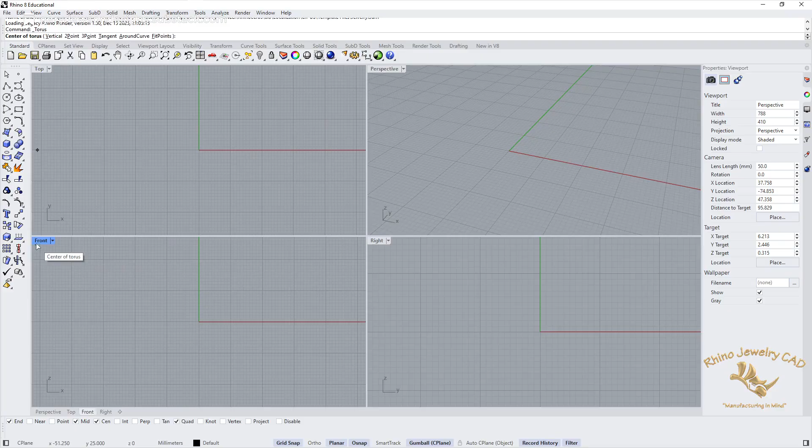So what we're going to do today is make a sort of signet-style ring out of a torus, one of Rhino's solid objects. In the front viewport, we'll start at the zero, the origin, we call it in Rhino.

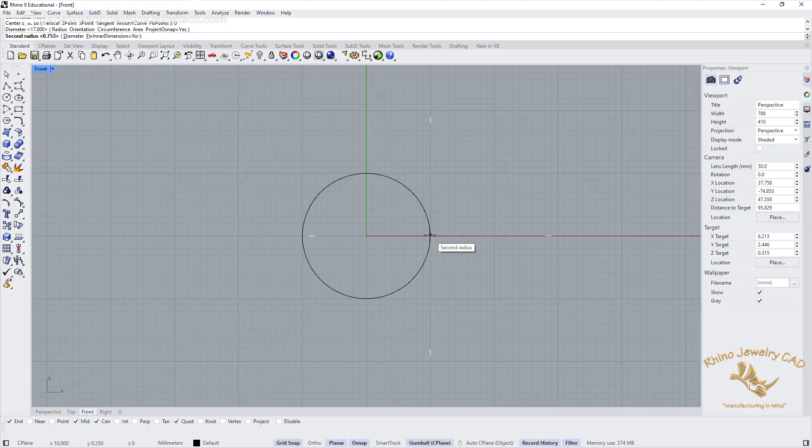We know a size 10 ring is about 20 millimeters in diameter, roughly. So this isn't going to end up a size 10, but we're going to make our first click out here at 20 millimeters. And then we're going to bring this in—let's zoom in here.

We want this to end up being a shank of about 1.5 millimeters. 2 millimeters wouldn't be bad—let's go a full 2 millimeters. And so now we have our torus. Let's see what this looks like in perspective view.

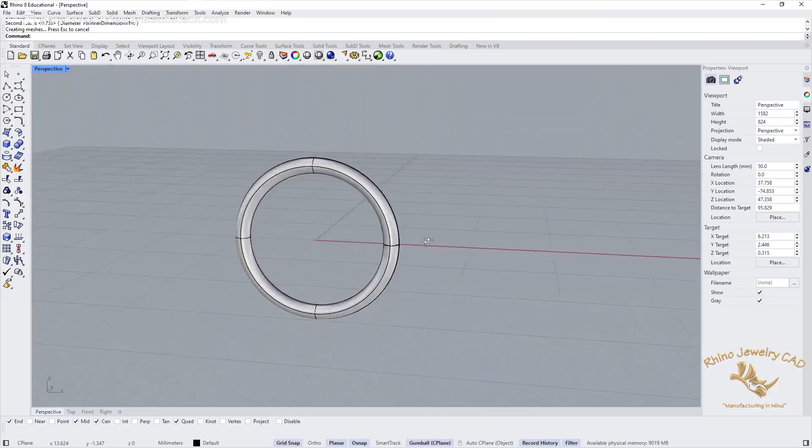Before we continue, we're going to do one thing here. We're going to select this object, go to surface edit tools, and adjust the closed surface seam. Right now it's at top dead center of the outside of this torus.

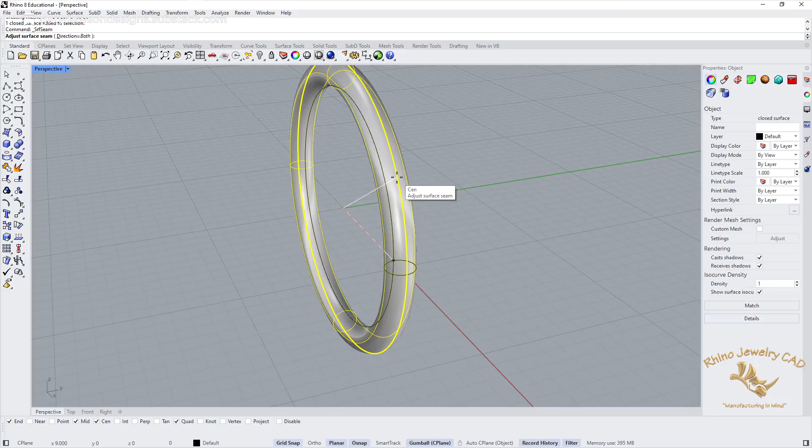We want to move it to the inside, just like that. Simple enough. And now, it didn't look like the seam actually moved. Let's try this again.

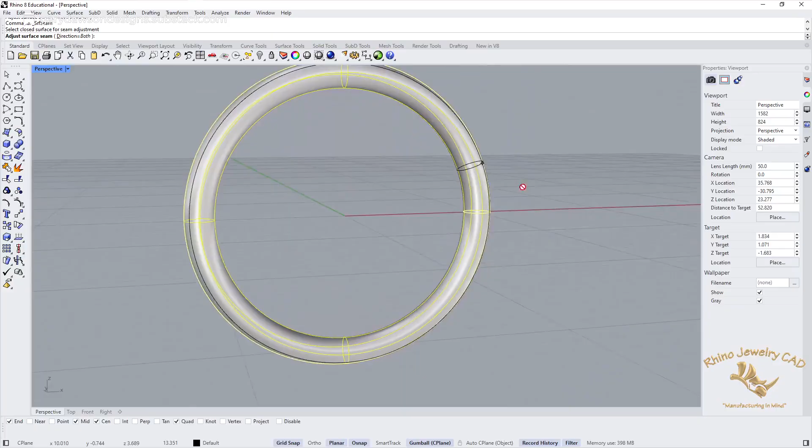Surface edit tools, adjust closed surface seam on here. Yeah, for some reason we didn't get it. Here we go, let's see. Yeah, there we go. And that should have done it, but it didn't. Here's the problem—it worked fine when I was practicing.

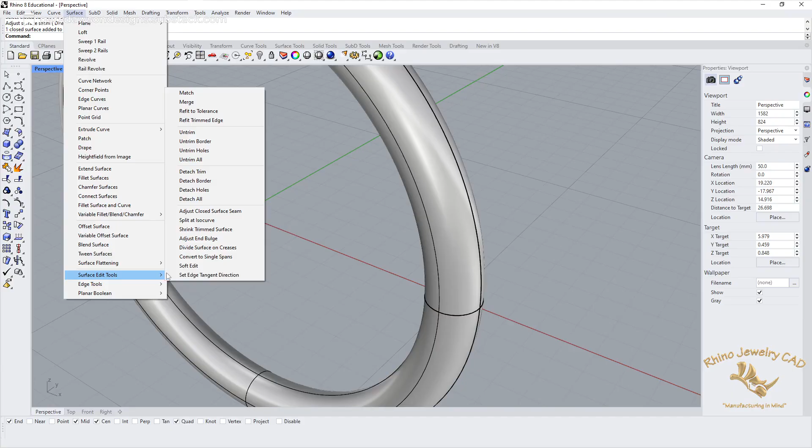Oh my gosh, we're going to do this one more time. Surface edit tools, I promise this works. Adjust closed surface seam on this surface, and we're going to take it from here to this midpoint. And I'm still not sure we accomplished our goal.

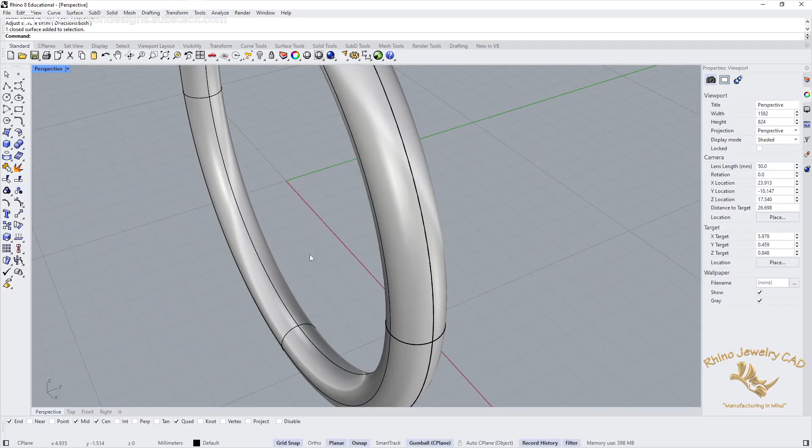So now, if you could see my face, you could see it's really red. I'm going to keep plowing at this until I can get it to work. Let's take off center, mid, quad, and end. Let's unclick end and try this one more time.

It's funny, when I was practicing yesterday afternoon, it worked just fine. Surface edit tools, adjust closed surface seam on this surface, and we want it to be right there.

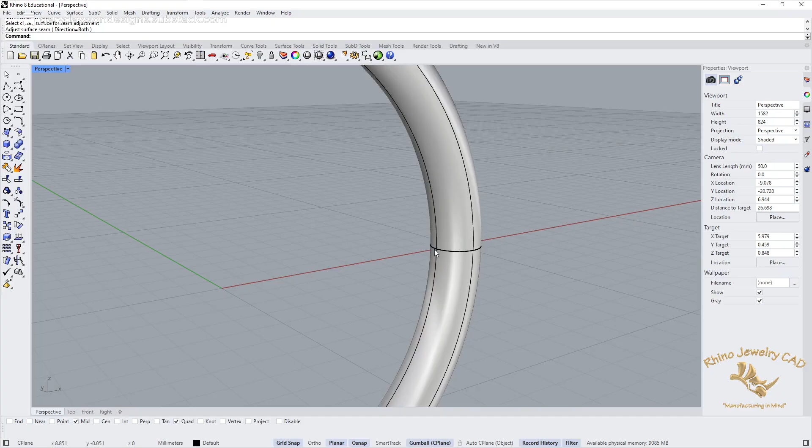And it still didn't work. Well, it's not imperative—it would have made this go a little more smoothly, and I'll have to come back and do a short video on why this didn't work for you. But let's proceed; I'll show where it would have made a difference as we get further into this. I apologize for that glitch, but that's the fun thing about doing a live demo—you see what happens when you're using Rhino, you run into these little things as they happen.

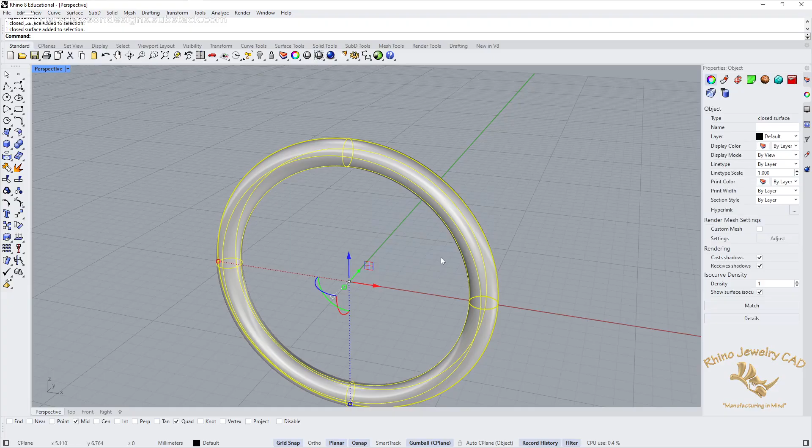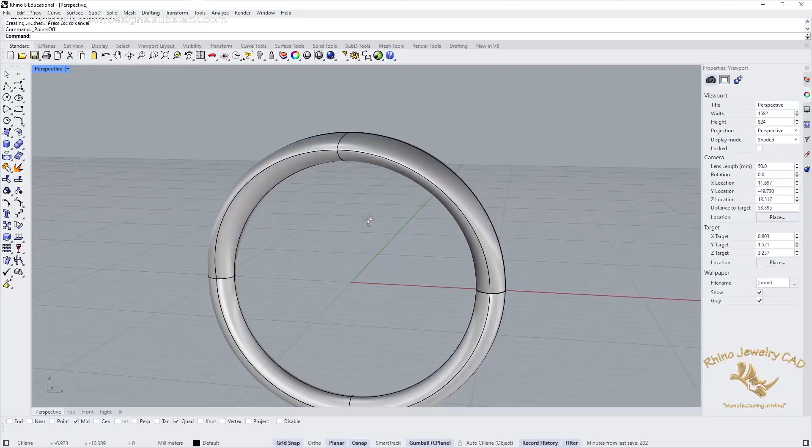Let's highlight this and turn on control points, F10. One of the things we want to do here is just make the top wider. Now, here's the deal—I'm going to turn control points back off, F11, really quickly. That's okay, that accomplished what I wanted, more or less.

But I don't like this transition. I'd like for that to be a much smoother transition, so I'm going to Control Z out of what I just did. I'm going to select this and rebuild, and when this pops up, you'll see I don't necessarily want more point count in either U or V, but I definitely want to change it from degree 2 to 3, and you'll see what difference that makes.

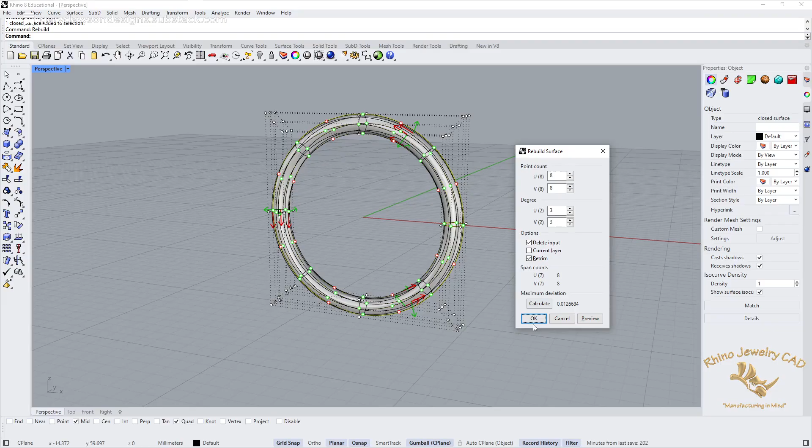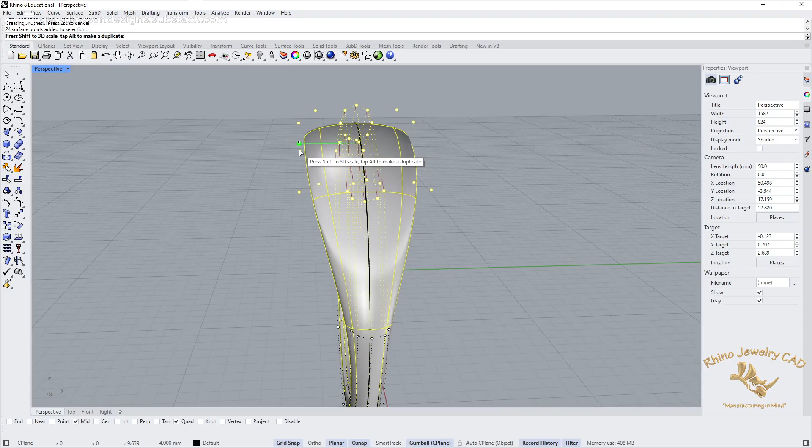Let's click OK here, and you can see our control points have changed a little in character in terms of how they follow the torus all the way around. Let's select that same group and do the same kind of scale we did before, and watch this transition point here. See how this is a much smoother transition into the top of the ring? I like that a lot better.

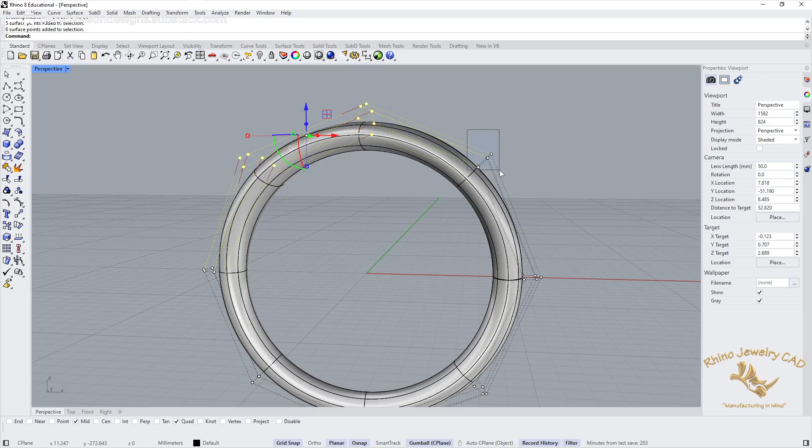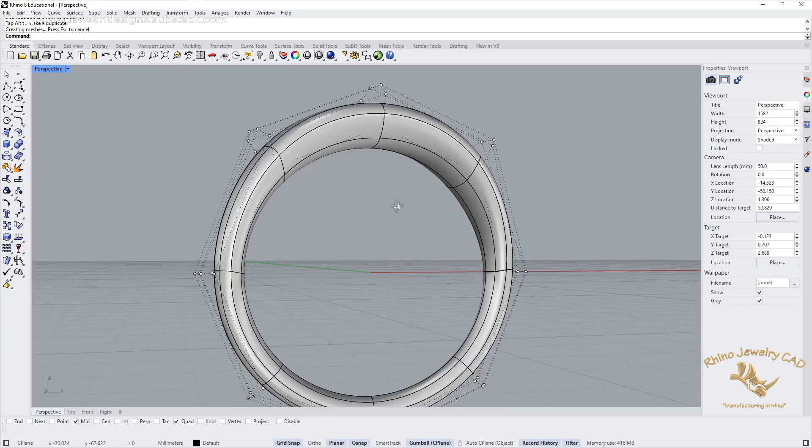Let's leave these control points on for now, and let's select this group of control points. Holding down Shift, we'll select that group of control points, and shift-select that group also. Now we're going to make the top of the ring a little thicker by simply moving those up. Again, since it's degree 3, we have a nice smooth transition all the way around. It didn't affect this transition much, but it gave us a thicker area to work with on top.

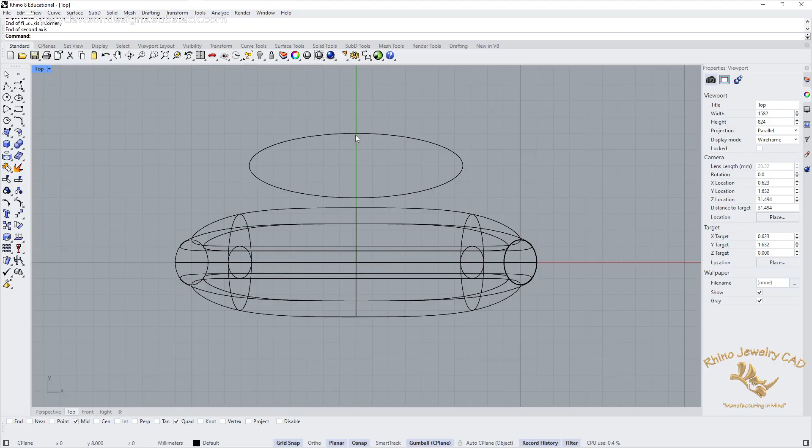It's getting fun now. Okay, let's turn off control points—that's F11. Pop into the top viewport, and let's make an ellipse. Have grid snap on, so this will make it easy. We're going to just eyeball this ellipse. I'm going to shift-constrain it out to the right about as far as I think will be appropriate for what I want to accomplish, which you'll see in just a minute. And then make it about that wide.

Then I can move this down so it's basically centered on the origin as well as the ring. Let's look at what we have here—okay, that's in perspective view. We're going to select, use the directional arrow just to move this up. And again, from the top viewport, we're going to type in the command project.

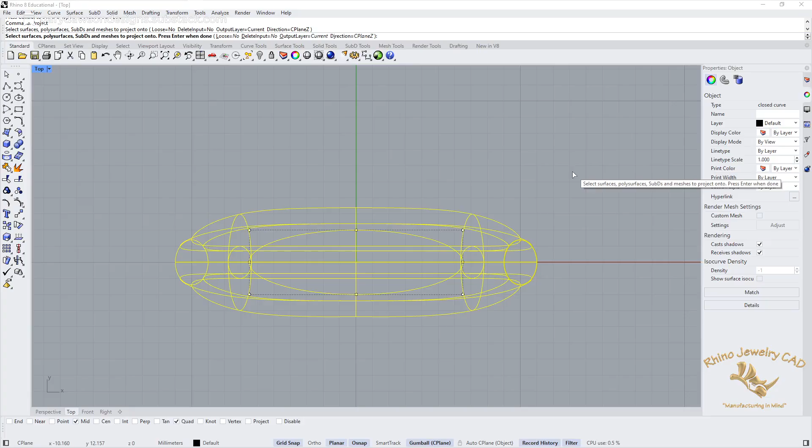Select surfaces—see, this is still just a single surface, so there's no way to isolate this projection onto the top of the ring, which is the only place we really need it. But that's okay. Press enter. Now if we look at this again, you can see the one at the top is really the only one we needed. Let's deselect that one and then delete the other highlighted ones. If we were doing good layer management, I'd put this on a layer so I could come back to it, but in this case, for the demonstration, I'm just going to delete it.

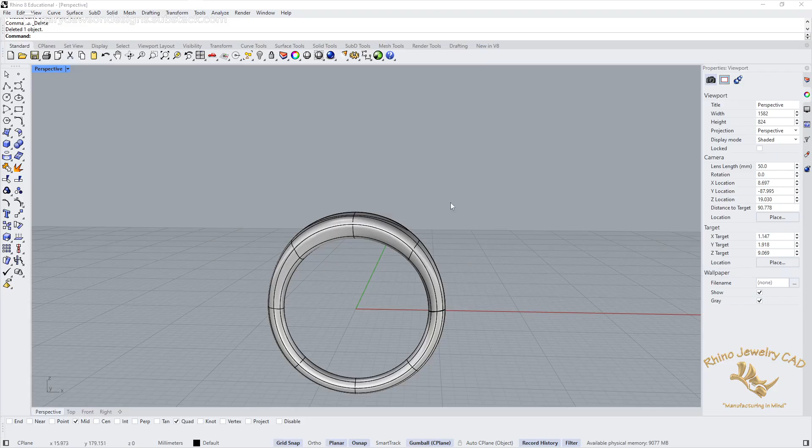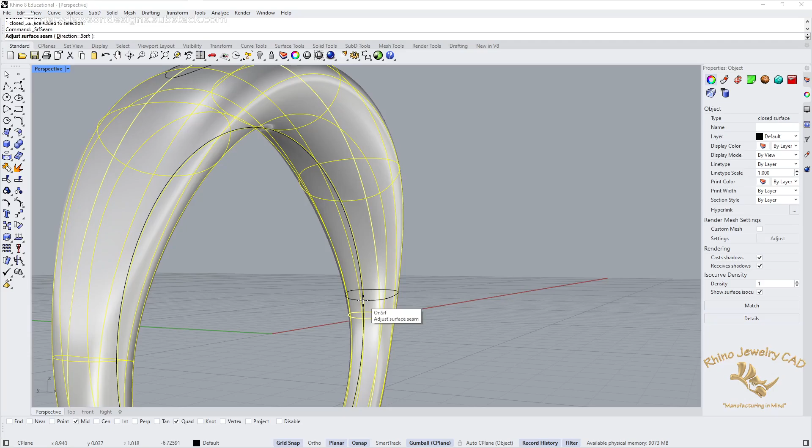All right, I'm going to try this just one more time here. Let's select the surface while we still have it. Surface, surface edit tools, adjust closed surface seam. Now I just don't understand why that's not working, but let's see if it worked that time. Oh, bingo, okay, we got it. It's not perfectly centered, but in this case it really won't matter. I'll show in the next step why this will make my life a little easier as we progress through modeling this ring.

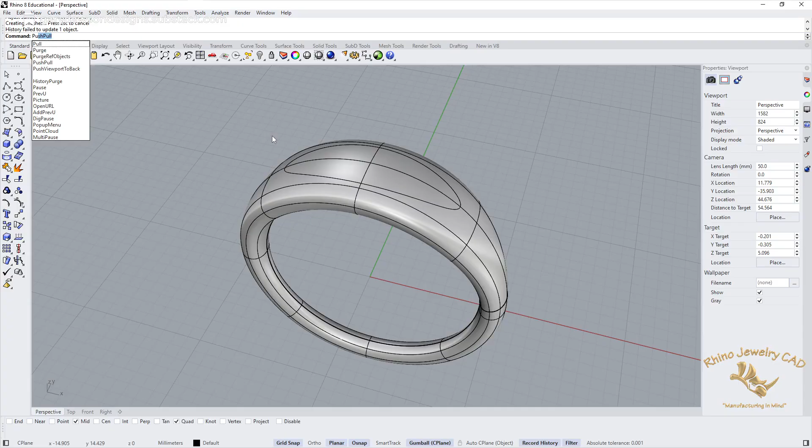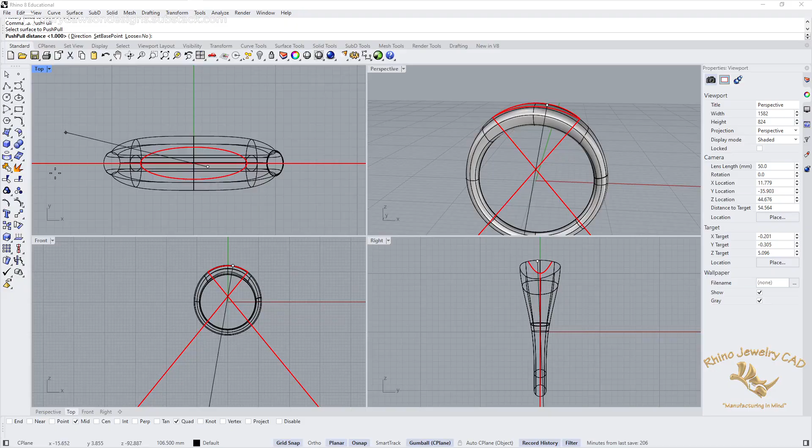Okay, now we're going to use a command that's new in Rhino 8 called push pull. We'll just type it in, push pull—Rhino autofill fills it out in the command line. We push enter, select the surface that is isolated by the curve on the surface we created with our projection, and notice how we can pull that out if we want to. In this case, I'm going to switch to the front view, and we're going to pull that surface in just a little bit. There are several ways to do this, of course, but this is a way that's relatively new in Rhino 8 using push-pull.

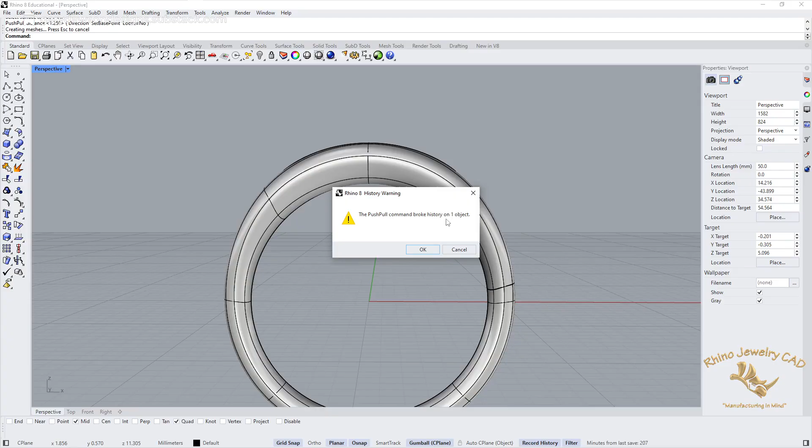Here's a very simple way to create an inlay channel or something similar. I'm going to Control Z out of that since I don't want it quite that deep. Let's re-invoke the command, do it here, and make it about that deep. Okay, that looks a little bit better. Even in a weird demonstration, I like to make things at least somewhat aesthetic.

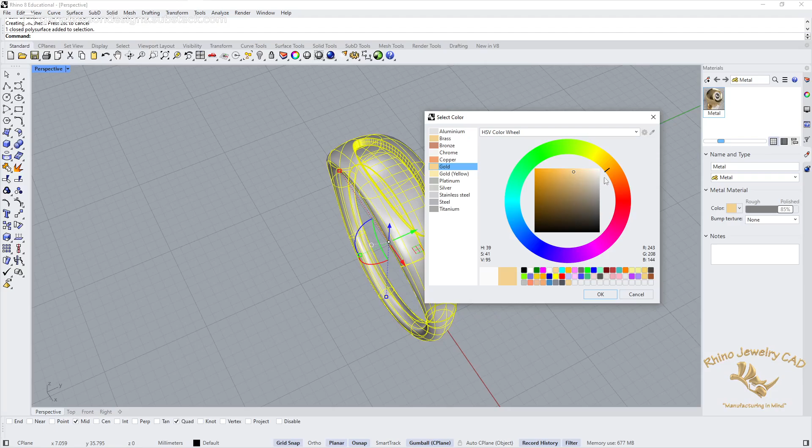Now the final thing we're going to do is talk about managing textures. You know that if we go into materials, we can assign a material to this. Let's make it a metal, and let's make that a rich yellow gold, which Rhino already has available. Then we right click on this to assign it to that object, so the whole thing is in fact that material. If we render it now, we can see it should render as a pretty nice gold.

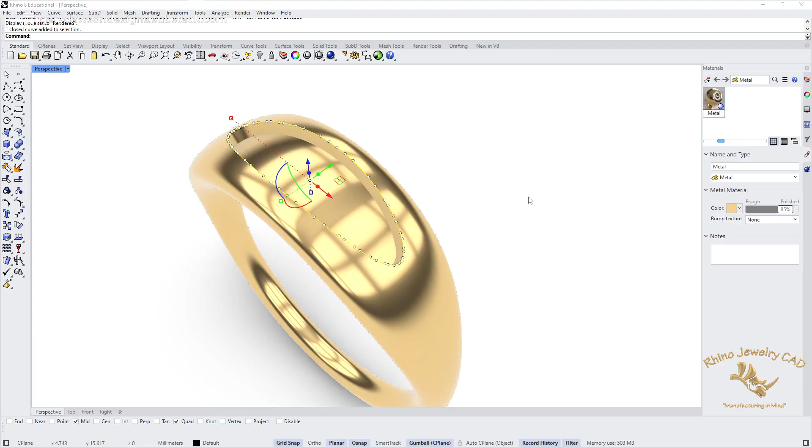Oh, we don't really need this curve anymore. Good layer management would have me put that on a layer somewhere, but in this case we don't necessarily need it again since this is going to be a short demonstration. So we'll do that, and we have this material applied.

We can, in shaded view, create another material for this. It will also be a metal, also a rich gold color, but let's make it a little less polished this time.

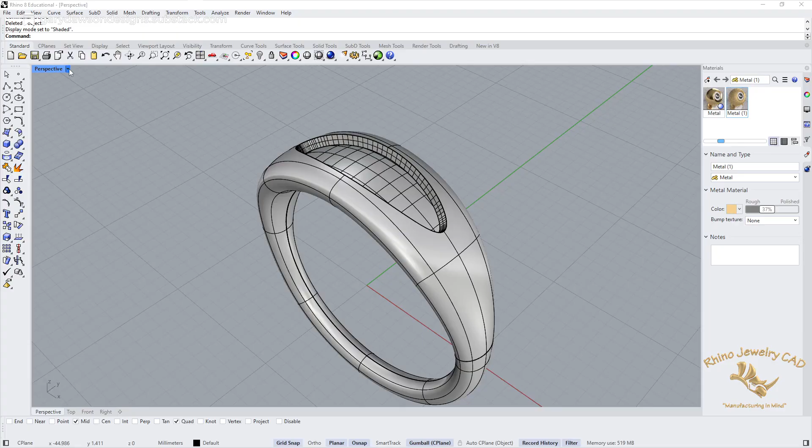Let's just look at what that looks like here real quick, rendered. We're going to Control Shift select just that lower surface and apply it to that surface, so we can get some differential there.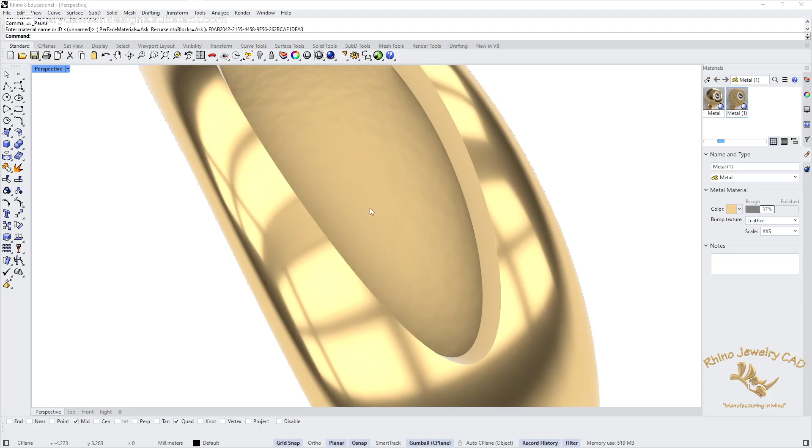We can also apply to this material - let's use leather here, a bump texture. And let's make this extra, extra small, which is kind of how it usually resolves best on jewelry sized items.

So you can see that we have a differential texture here, but now here's the thing: these bump textures you get in the materials application are only for rendering purposes. We go back to shaded view and it's not there - it does not exist.

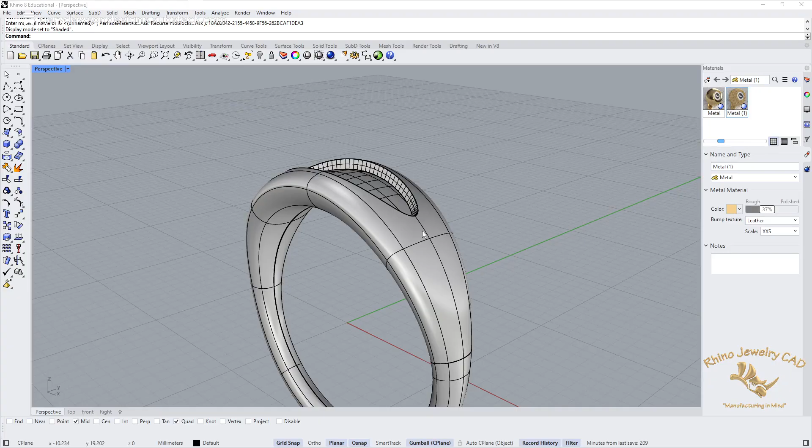So if you export this as an STL, even if it's in rendered mode, that surface texture is not going to go along with the STL file. So that's not exactly how we want to do this - we'd like to be able to print that textured surface right on there. So how do we do it?

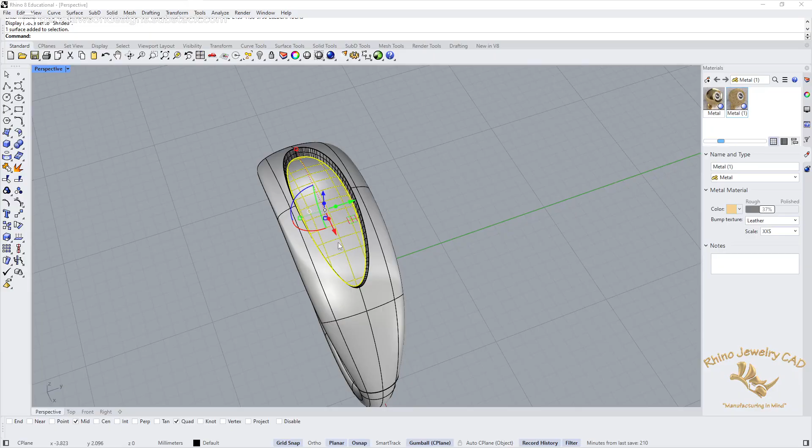Let's Control Shift select that surface. Oh yeah, and the reason for moving the seam, by the way, was that if the seam were still on the top of the ring, this would have ended up being two separate surfaces. Now that wouldn't have completely messed up our operation here, but having it be a single surface by moving that seam just makes it a little simpler for us to think about and work with.

Okay, while we have this object selected, let's go to Object Properties and Height Field - I'm orbiting over here in the upper right-hand part of my screen. We're going to go to displacement, that little globe with bumps on it called displacement. Okay, let's assign a texture here.

We don't have any to assign yet necessarily, so let's make a texture. I think there's a leather texture here somewhere - maybe not. Okay, let's just do a granite texture, all right.

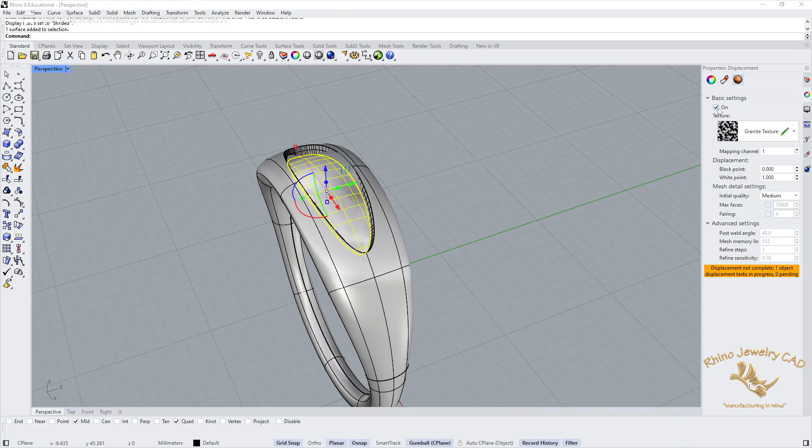And we will turn it on. And we don't see much here. Let's change the displacement values for black point and white point - let's change black point to negative 0.1, white point to 0.1, right?

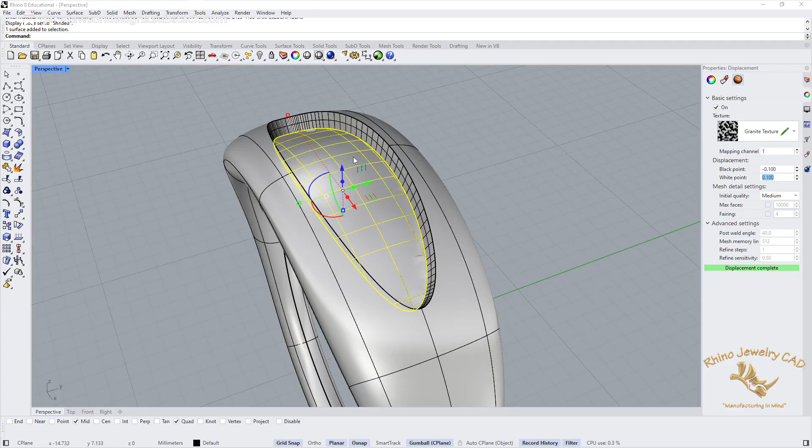But see, we're not - you can just see the beginnings of this texture sort of here and some tessellation that's going on. But we could actually, if we were able to change it from medium to high or very high, which comes up in the pull down here, then we could actually begin to see - this would be sort of on a jewelry scale - so we could actually see what this texture looks like and get it to print.

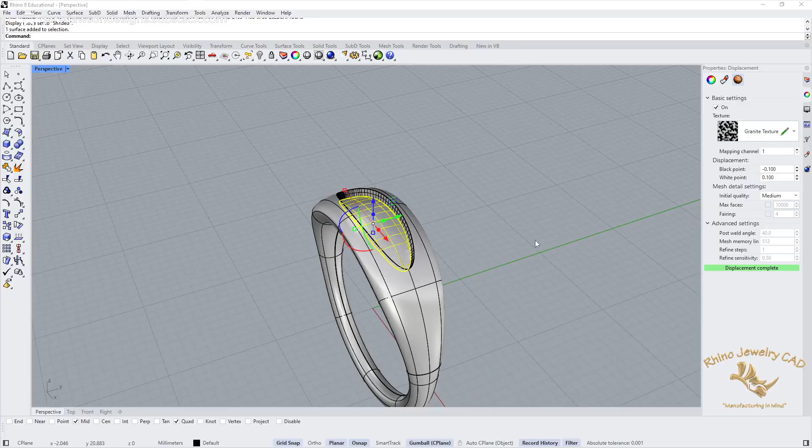Now, I wouldn't call this a glitch in Rhino, but in order to make this work there's something else you have to do. You have to select the whole object, and it works best if you create a different texture.

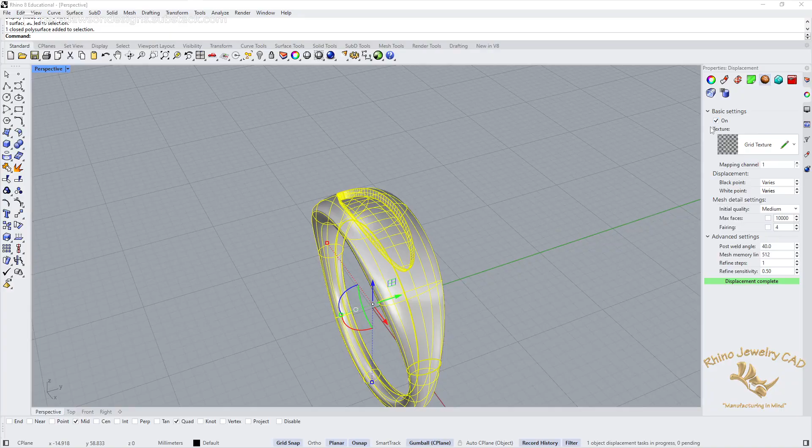Let's use this one, a grid texture, all right. And we will turn it off. But here, while we're here, let's actually turn it on, and you can see what happens here, just so you can see how this works. This is medium quality, and you can see that's not a very attractive piece of jewelry so far.

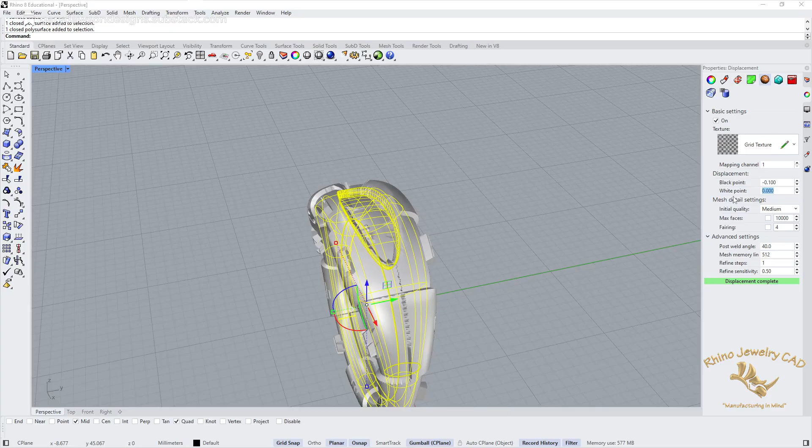But we click on this, we do our black point, negative 0.1, and our white point, 0.1 - that's going to help things out a little bit. But now watch what happens when we go to, say, a very high displacement. And see, that's still not exactly what we want with this.

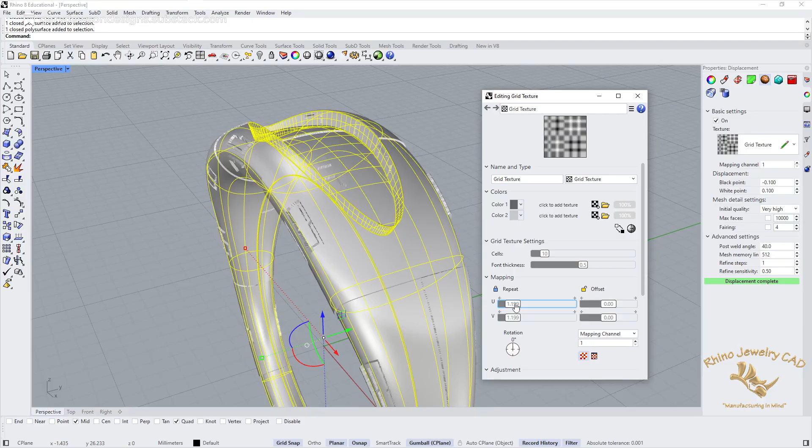So we're going to change a couple more things here. Let's click on the little pencil, and we will repeat this a bunch more times to get the displacement - see, the displacement's got to keep up with it. Here we go.

And the offset we can play with. Down here, there's a gain, gamma, and multiplier. We can make this be more of them on the surface or less of them on the surface. See how you can make these changes, multiplier, color adjustment.

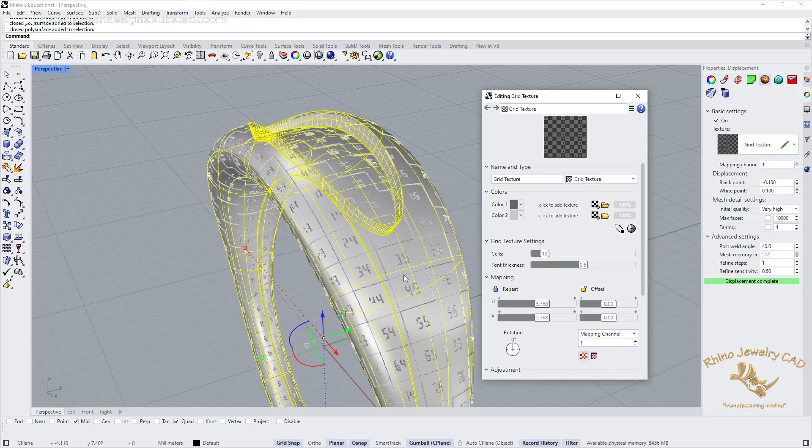But this is almost irrelevant, because what we're going to do now is turn this texture off, and then go back to this and turn on the granite texture for just that specific surface, and then turn that on.

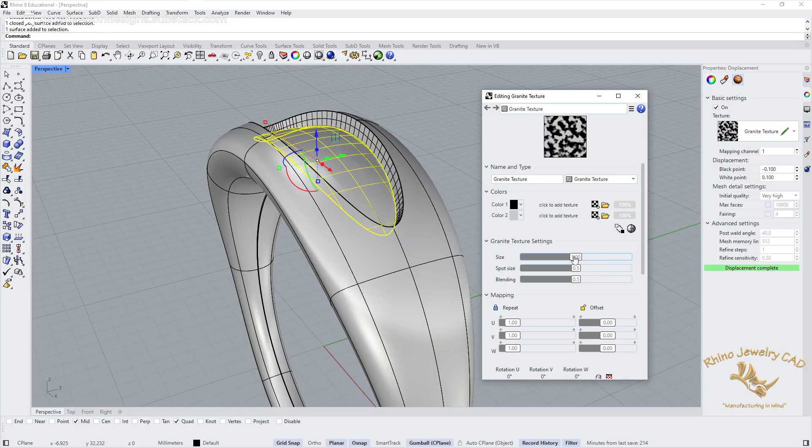Now we can play with this a little bit. Size, let's move the size down quite a bit. There we go. Now we're starting to get exactly what we want out of this. Okay, repeat it. There we go.

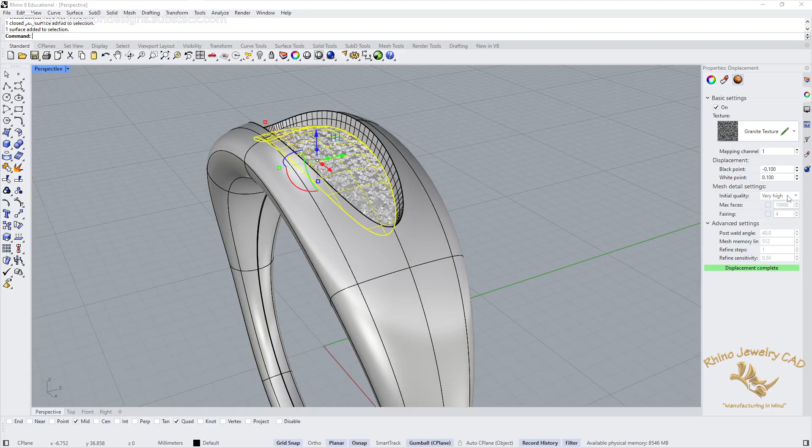You can see the displacement. It takes Rhino just a little bit to figure out or to program the displacement into it. But that's pretty darn close to what we wanted. Now we have this at very high resolution. If we zoom in on this, this is a printable surface now.

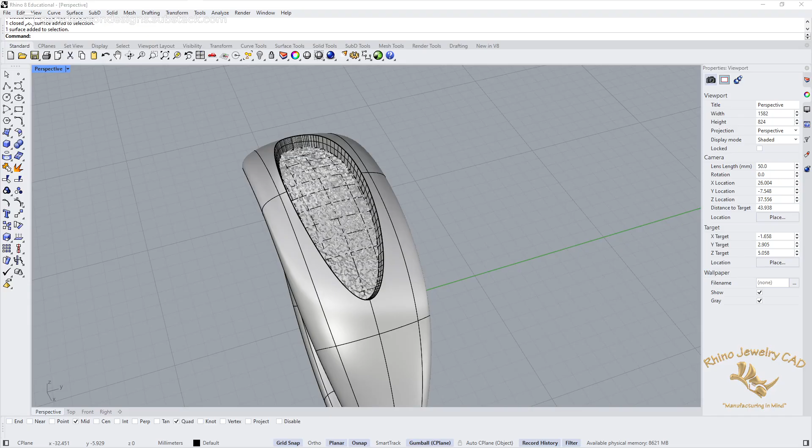You can also use a bitmap texture if you have a picture that you'd like to have reproduced here. Let me see if I can find really quick. Stand by one second, and I'll show you something if I can.

Let's get, oh, here's what I want to do. Coming up should be another version of Rhino. Let's open. Let's go to my inventory and I'm going to search for cactus. Cactus, turquoise. No, let's see.

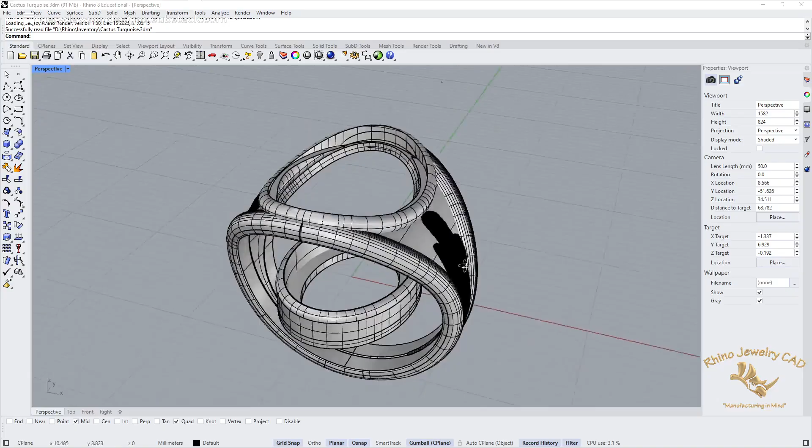Okay, we're going to bring this one up. You can look at it pretty closely. Okay, here we go. And if we render this, you can see, okay, this texture actually came from a picture of a saguaro cactus. So that's how you can use a picture to create a texture.

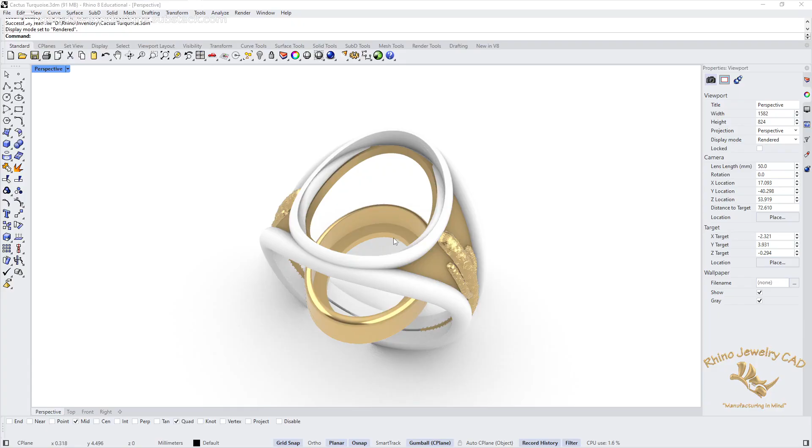I could go into a little more depth about that, I suppose, but we're getting near the end of the time I planned for today.

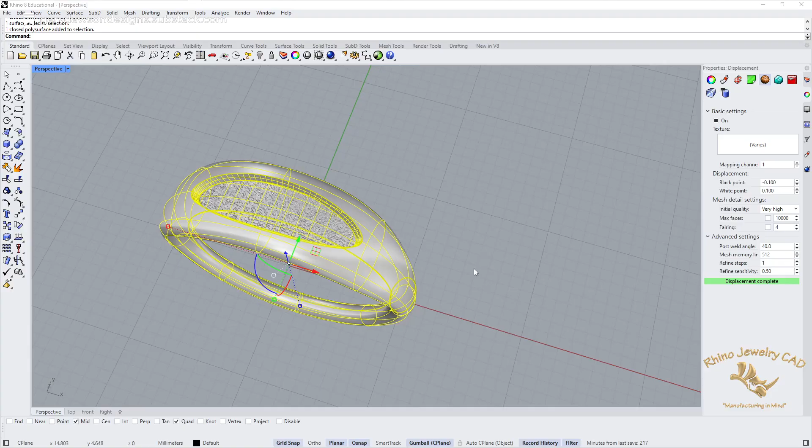So let's bring back our signet ring. Just to test the theory here, so you can see I'm not joshing you about this stuff, let's pick this and we'll alt-copy it over here. And you can see how this texture actually came with it.

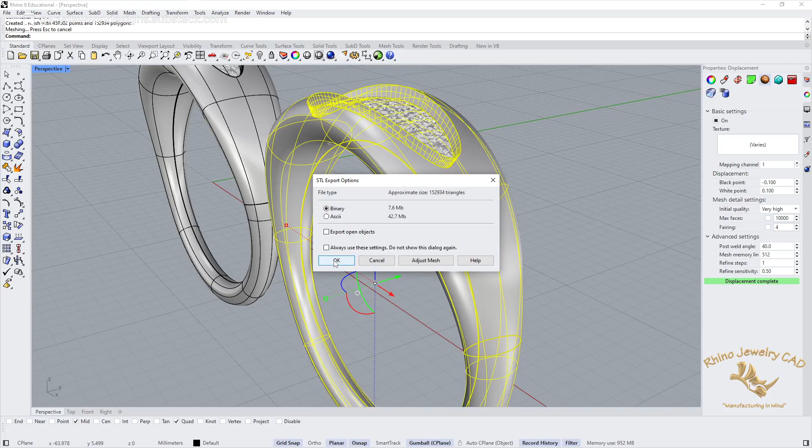And just to test one more time, if you'd like to, file, export, selected as an STL file. We'll call it texture now. Okay, and now let's just import that. File, import, texture now. Okay.

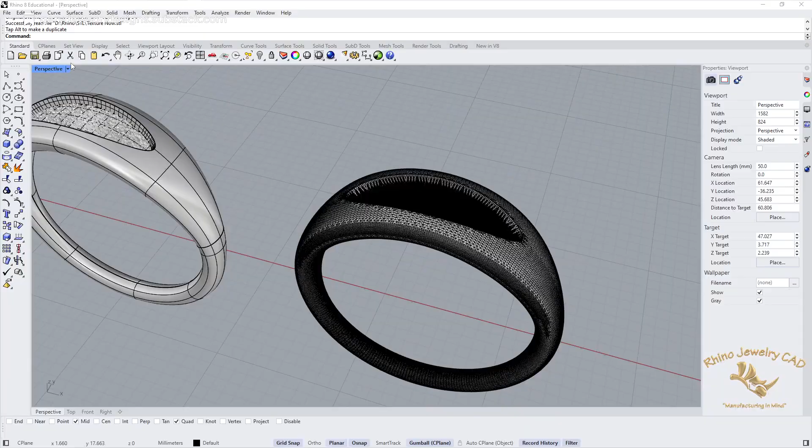And we'll move this STL mesh over here. We're probably going to have to render it to see what it looks like. But see, the texture did export with the STL file.

All right, so remember, here's the trick that you need to know: if you want to do a differential texture on a piece of jewelry, you first have to apply a texture to the whole object in order to be able to use the different resolution settings that are built into Rhino in the object properties.

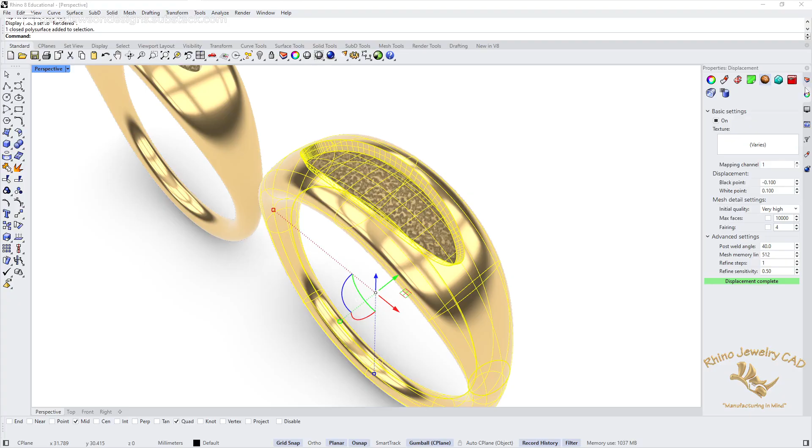Oops, that one was a copy, so let's go to this one. And we can go to object properties, texture off on the whole thing, and then on granite texture here. Then we can get to these higher settings of initial quality and max faces, and all this other stuff remains viable. Okay, well, that's it.